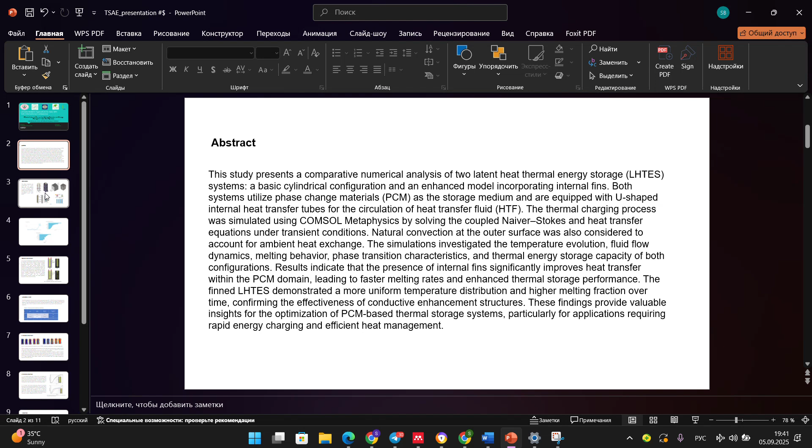Introduction part. This figure compares the configurations of a PCM block with and without internal fins. The presence of fins enhances heat transfer and accelerates the melting process, whereas in the absence of fins, heat propagation occurs more slowly.

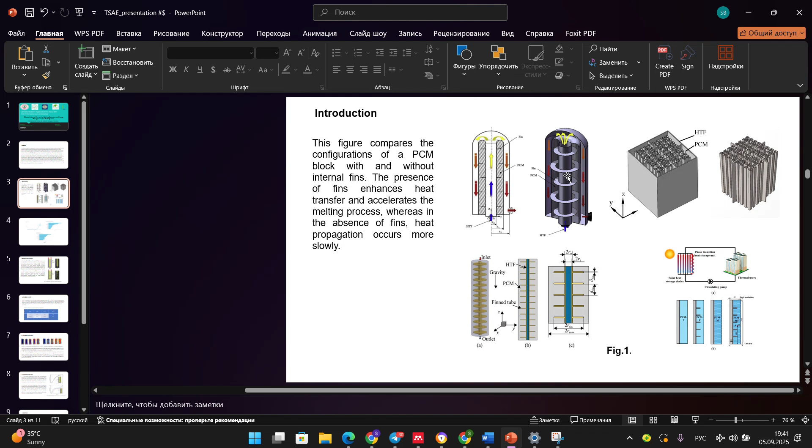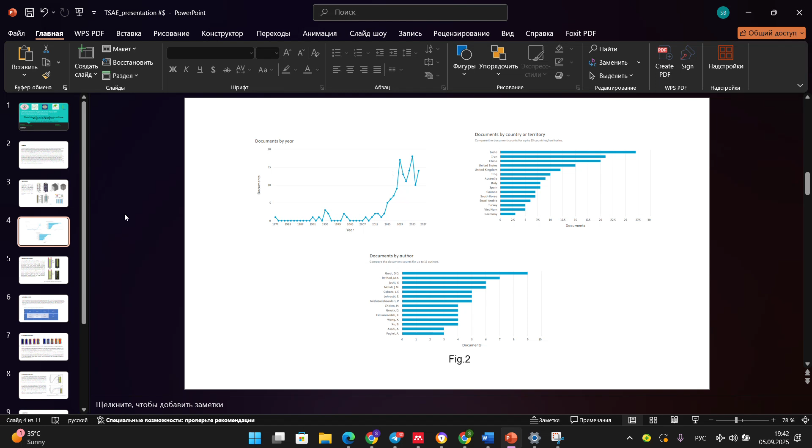Next, materials and methods. In this study, finite element analysis was employed to numerically simulate the thermal and fluid behavior of two latent heat thermal energy storage configurations, simple and finned, using COMSOL Multiphysics. The FEA method enabled accurate modeling of the coupled heat transfer, phase change, and fluid flow processes within the computational domain.

By discretizing the geometry into a high quality mesh and solving the governing equations for momentum, energy and phase transformation using FEA, we were able to capture detailed temperature distributions, melting fractions, and velocity fields over time. The simulation results provide insight into the performance enhancements achieved through the finned geometry compared to the conventional setup.

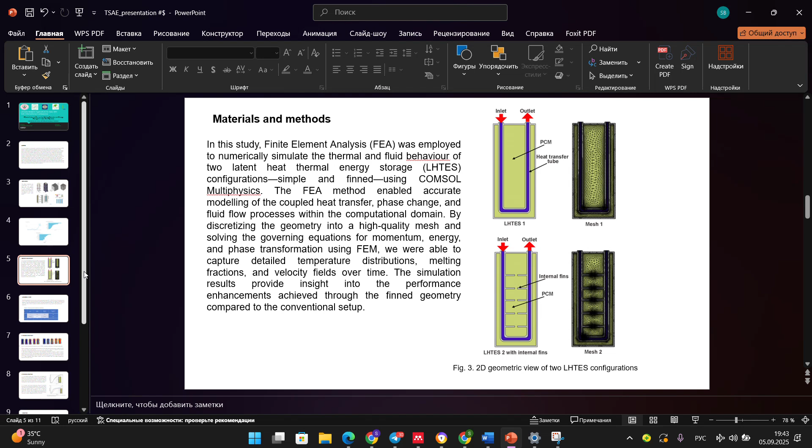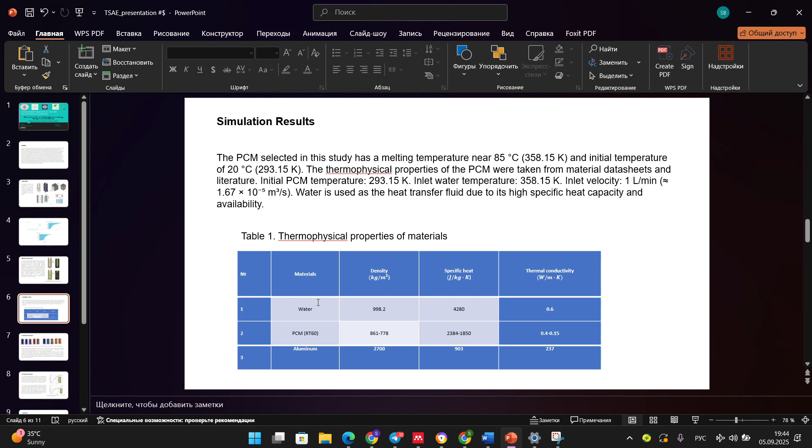Simulation results. The PCM selected in this study has a melting temperature near 85 degrees and an initial temperature of 20 degrees. The thermophysical properties of the PCM were taken from the material datasheets and literature. The materials: water, PCM, aluminum.

Figure 4 displays the surface temperature contours of two latent heat thermal energy storage units at 5 distinct time intervals: 1 hour, 3 hours, 6 hours, 9 hours, and 12 hours. Figure 4a represents the simple configuration, while figure 4b corresponds to the finned configuration.

In the simple configuration, the temperature distribution reveals a gradual thermal penetration into the PCM. The core region remains significantly cooler even after 12 hours, indicating slower melting and limited heat conduction beyond the periphery. At 1 hour. Only the outermost layers experience a notable temperature rise, while the core remains near its initial state even at 12 hours. Large unmelted zones remain evident from the persistent dark blue areas representing temperatures below 330 Kelvin.

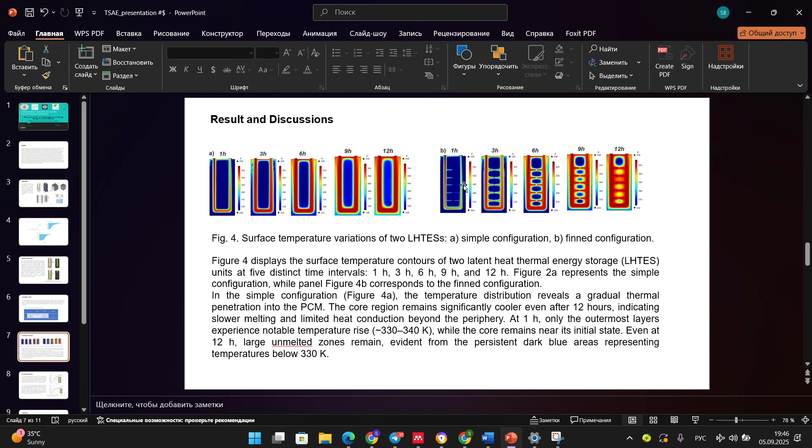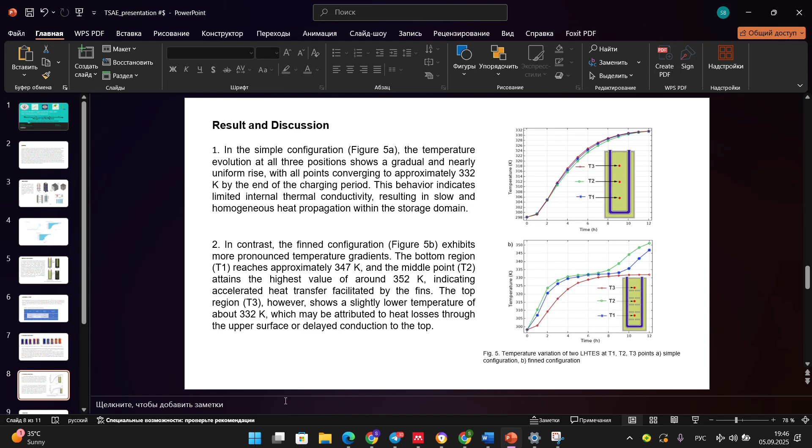Conclusion: in this study, a numerical investigation was conducted to evaluate and compare the thermal performance of two latent heat thermal energy storage configurations, a simple configuration and a finned configuration. The simulations were performed using COMSOL Multiphysics, incorporating finite element analysis under transient conditions over a 12-hour charging period. Natural convection was considered across the surface of the storage unit, and water was used as the heat transfer fluid.

The results demonstrated that the finned configuration significantly improved thermal performance compared to the simple design. Temperature distribution analysis revealed more effective heat penetration and higher thermal gradients in the finned LHTES, particularly in the bottom and middle regions. The melting fraction and stored energy analysis further confirmed that the addition of fins enhanced the rate of phase transition and increased the overall energy storage capacity in the critical regions of the PCM domain.